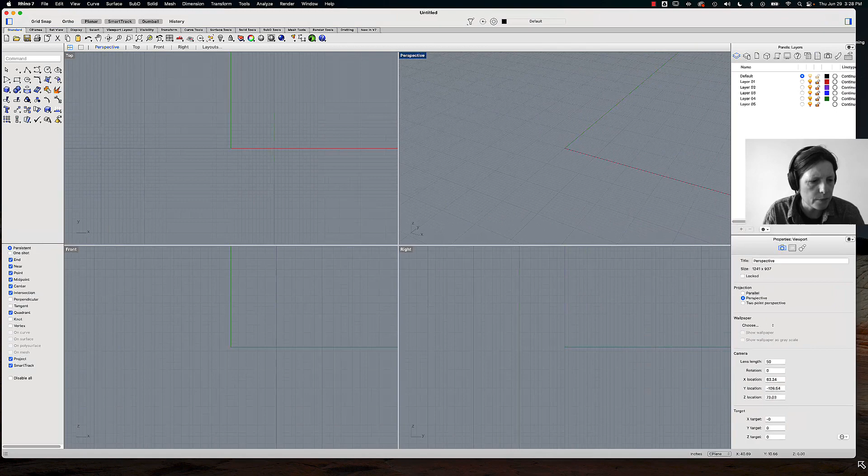Okay, so here we are. Here is the basic interface. I am working on a Mac, so if you're on Windows, your interface will look a little different. If you are on a Mac and don't have these tabs, I will show you in a minute how to change your interface preferences so that you see those. They're actually quite handy, and they also give a bit more similarity between the Mac and Windows versions.

Okay, so the first thing I'm going to do is talk a little bit about the interface. Like any other application, there is a menu bar up here, and you can see these are some of the things that you can do. You can draw curves and surfaces, solids and mesh. Here are some dimension tools, etc. So that's the menu up here.

The next menu we have are these here: grid, ortho, planar, gumball, etc. For the Windows version, you will go down here—they should be down there.

Moving down, we have this area here. You can see command—I'm going to get into that in a minute. That's the command line, which is a very central part of Rhino and something very useful. Below this, you have a bunch of icons to create geometry with. Below that, we have what are called object snaps, and we can also refer to those as O-snaps. We'll definitely be using those a lot throughout the course.

Then you will see your main window here. We have 4 panels, and you can think of those as windows into a view. The default opens up as the top view, perspective view, the front view, and the right view. I'll get into that in a minute again. You can also change the views here, but if you only want to see the top view, you can click on top, and that's going to open up the top view.

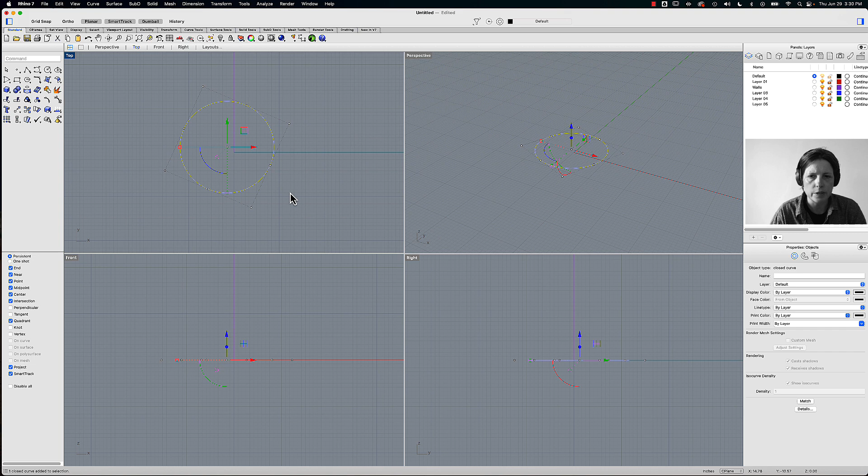Underneath here is our properties. For example, if I draw a circle, you'll see this will contextually change to whatever object I have in here. I can show and hide these side bars with this icon here, if I wanted a bit more real estate, like so, and I can bring them back. I think that's about everything.

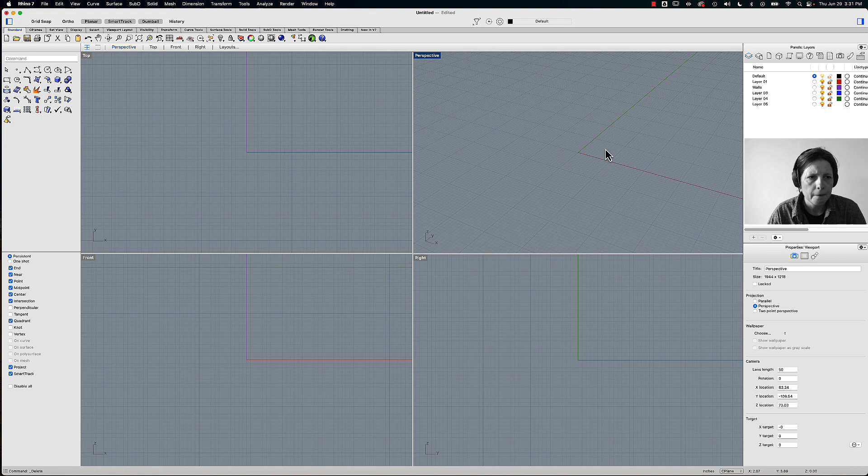You can also move these panels. Let's say you have a lot of layers and need a bit more visibility, you can open that up a bit. I can also drag these windows. So let's say perspective view is my main view. I'm going to make sure that's the biggest view, and resize my other views. Let's bring that back to where that was.

Okay, so that's the viewports. Let's look a bit at navigation. Before going into drawing objects in Rhino, I'm just going to pick a box real quickly, and I just drew a box in perspective view.

You can see the default is what's called wireframe mode, which just shows the wireframe that creates the geometry. If I want to change that view, I can right click on this tab and go to shaded, rendered, or ghosted. So I'm going to choose shaded, and that will create a shaded object.

Now it doesn't change for these other views because I'll have to change that as well. So let's go to the top view and say shaded. I can change the views independently, which is quite handy. I'm going to keep this one to wireframe.

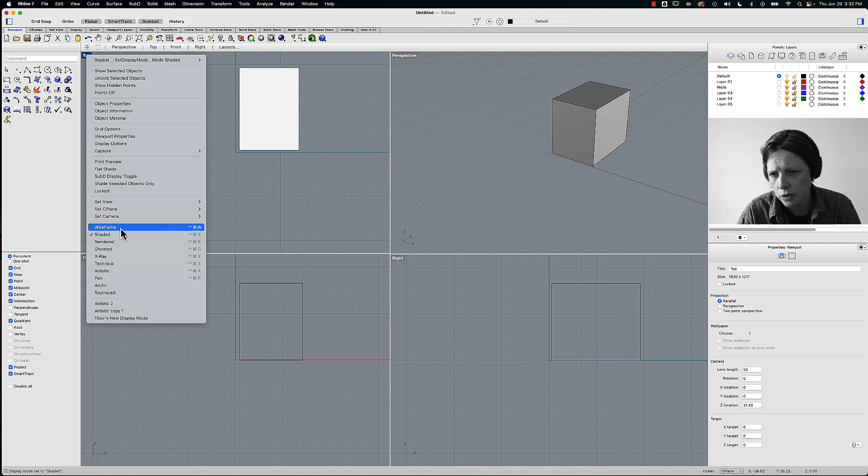Some other view modes that are handy are ghosted, which allows you to kind of see through the object. The color of your ghosted object might be different than mine because I've played around with my preferences, and I'll show you how to change that.

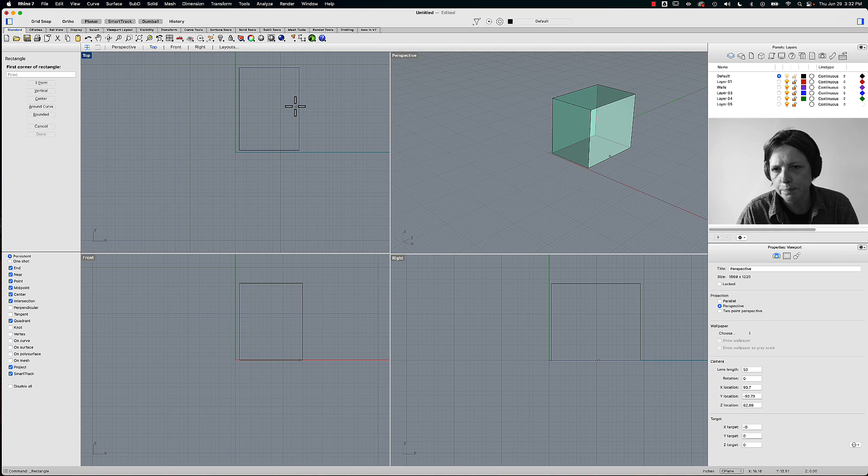What's great about ghosted is that, let me just draw an object here, I can see through it, but I can still sort of see what's going on with the outside geometry, while also seeing through it. Let's compare that to shaded over here, so you'll see what the difference is.

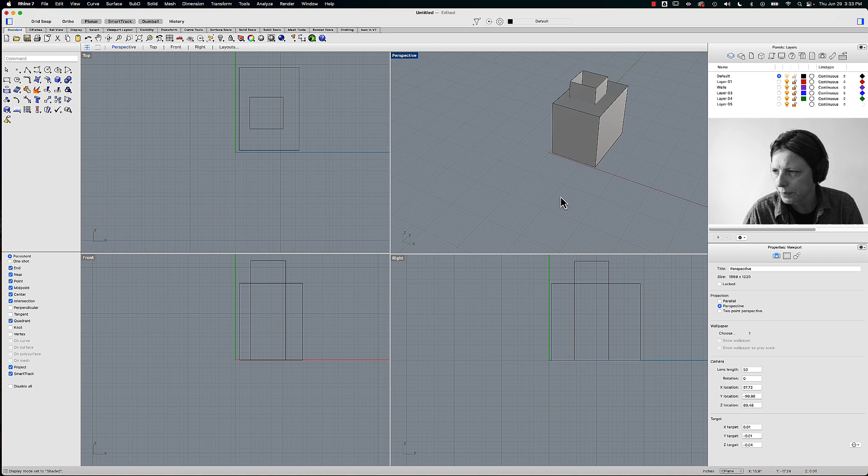Okay, so that's a little bit about views. Let's talk about navigating now. Simply put, always make sure you have a 3-button mouse. You want something that has a scroll wheel in the middle and two buttons, a left and a right.

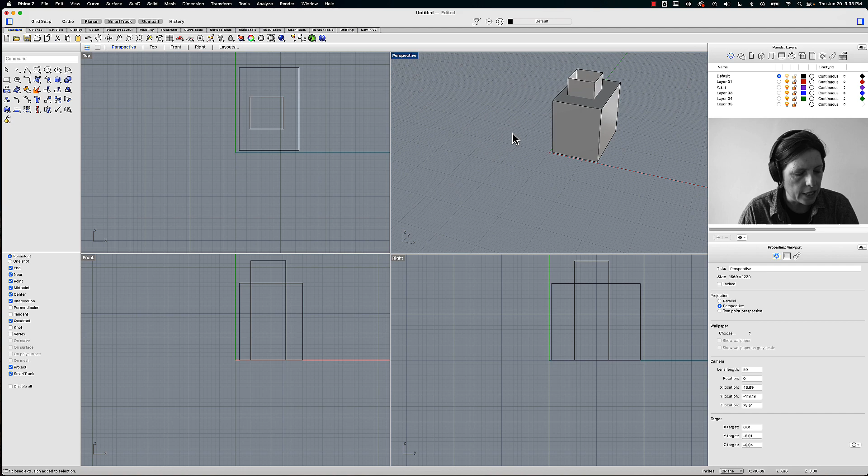In order to zoom in and out in perspective, I can simply scroll away from myself or scroll towards myself to zoom out. That's zooming, and that goes for all the different viewports. I don't even have to select the viewport, I can simply hover over it and start scrolling, using my scroll for zooming in and out. So let's go back to top view.

I'm scrolling in. The other thing I can do is pan. I can use this icon here, or I can right click and drag. Exactly the same goes for front view: zoom in and out, right click for drag. On the right, zoom in and out, right click for drag.

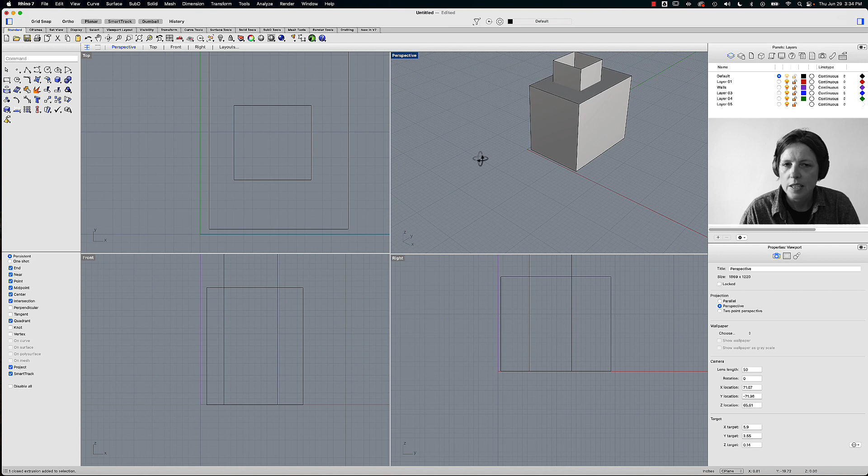But in perspective, zoom in and out, you'll see right click actually rotates. So perspective has one more navigational function, which is rotate, because we're in perspective. We don't need that in any of the other viewports. So in order for me to pan, I hold down Shift and right click. Shift and right click is pan, and just right click is going to be revolve.

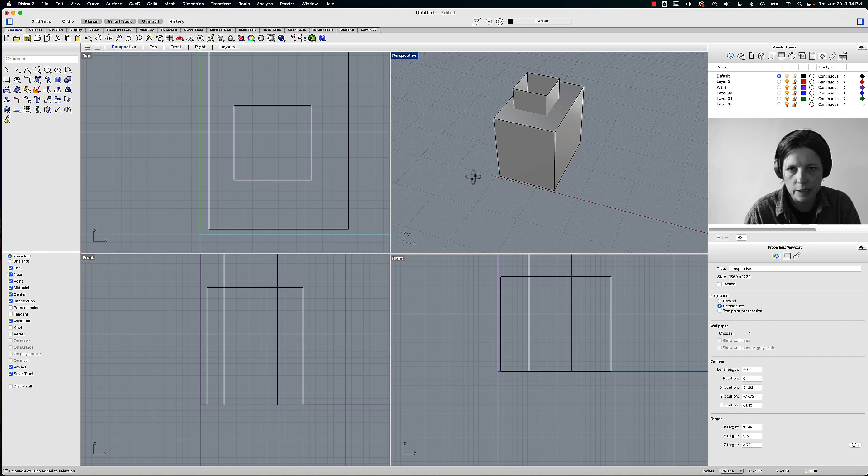You can also find those icons here: here is rotate view, here's pan, here's zoom. I hardly ever use these icons. It's good practice to really get to know the shortcuts.

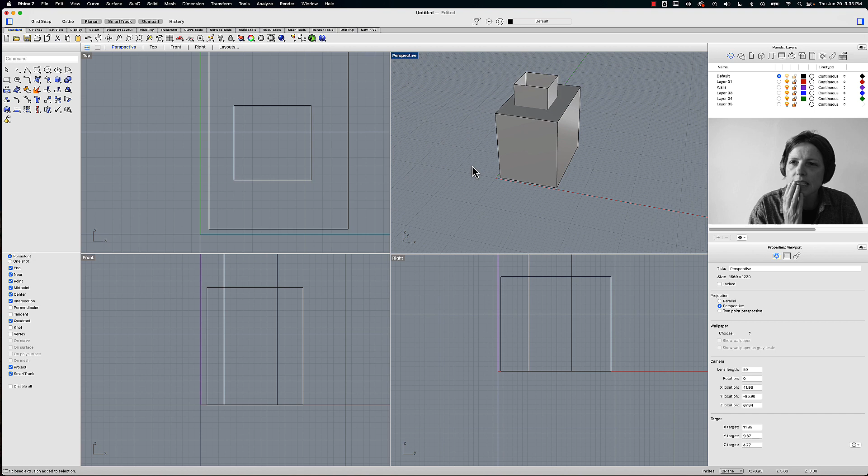Okay, so the next thing I wanted to talk about is how we create things, objects, geometry in Rhino. There are a few different objects, and we'll get more into that in the 2D lesson, but I want to talk about how you can actually create objects. There are 3 ways you can create objects or geometry.

And the first one is up here on this menu. Let's say I want to draw a circle. I would go to Curve, Circle, and this is telling me how the circle is defined from the center and then the radius. So I click on that. You'll see that this panel here changed to my command line with all the options for how I want to draw a circle. It's asking me for the center of the circle, so with my grid snap on, I click here in the center, and now it's asking what is the radius. I'm just going to drag out, and there is my radius. So that's one way of creating a circle.

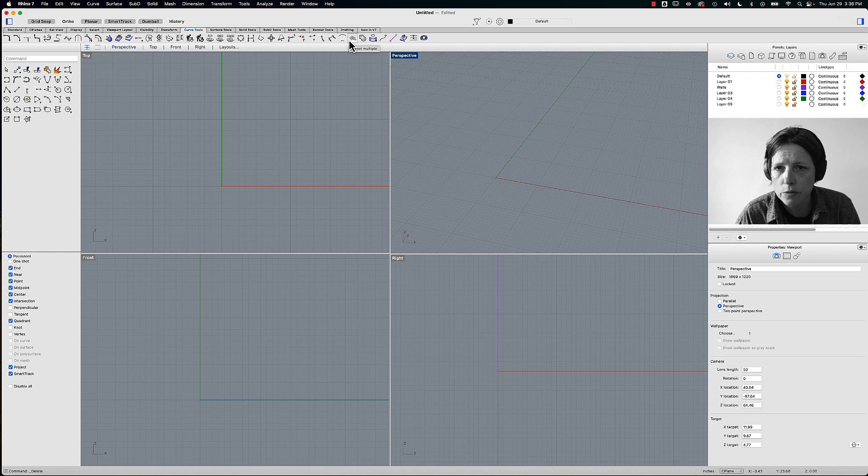The next one would be to go down here to Curve Tools, and let's see if I can find circle. I actually don't see circle on here. I guess I have to go here. So I would go here and draw a circle. Alternatively, if I don't have this tab on and I'm in standard, you'll see that here's circle, circle, center, radius. So that's the second way how we can create geometry.

The third, and I think the most useful way, is using the command line. Unlike many programs you might have used, this might be new for you, but Rhino is a command-based application, which means I can type in commands that function like macros. They tell Rhino what to do.

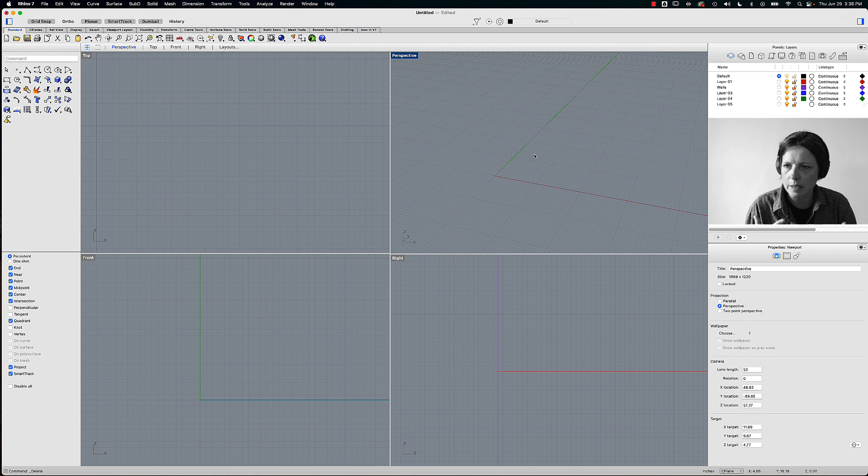So for me to draw a circle, I can just start typing CIR, and you see there's circle. Now, one thing a lot of beginning students do is click in the command line and start typing there. You don't need to do this. I could be anywhere and just start typing circle — it speeds up the process a lot. So here's circle, I'm going to press enter, and I can do everything now with my keyboard.

It's asking me for the center of the circle, so I'm just going to type 0. If I just type 0, that means X is 0, Y is 0, and Z is 0. You can see there is my point in the center of my perspective view. It's asking me for a radius.

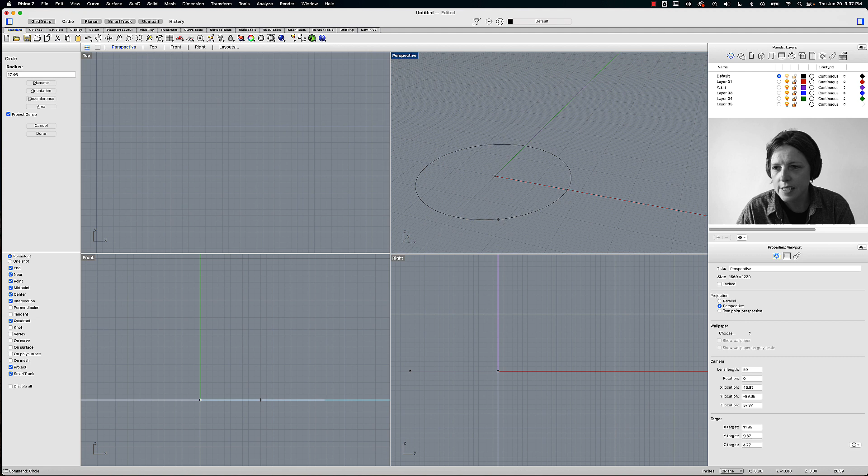What if I wanted to draw a diameter instead? Well, you can see on the left it says diameter, and under the D there's a little line. That means if I click D on my keyboard and then enter, it will let me put in diameter. So let's say instead of 34.93, I want a diameter of, I don't know, 12.89, something random. Then I press enter, and there is my circle.

And I can do that with many, many objects, a lot of geometry, simply by typing in. So let's do another 2-dimensional object like a rectangle. Rectangle — where do I want this one to be? Let's say I want this one to be 0, 5, 5. And then I'm going to make it 50 and 50 in the length and width.

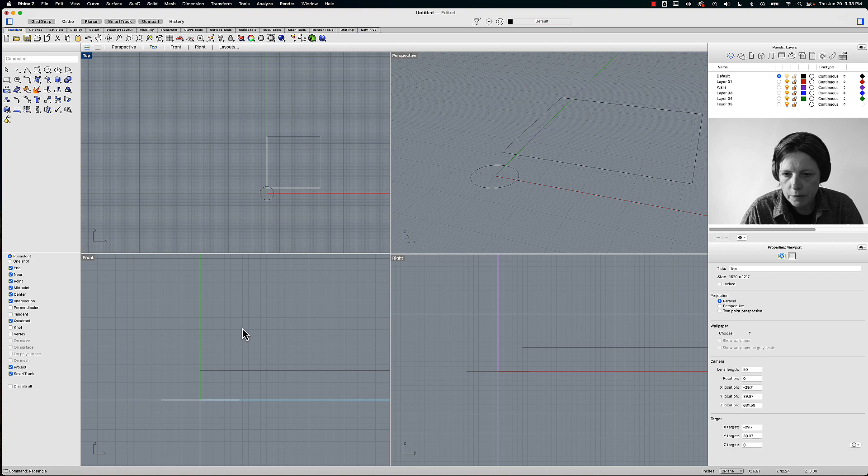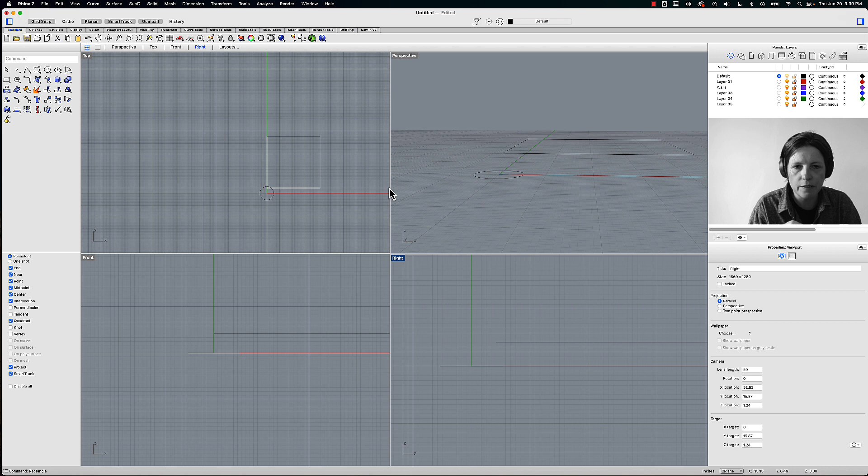And there we go. Now, what you will notice is, let me just go to the right view here — my rectangle is sort of hovering. That is because I typed in 0, 5, 5: 0 for X, then 5 units in the Y, and 5 units in the Z. So you see it's kind of hovering there.

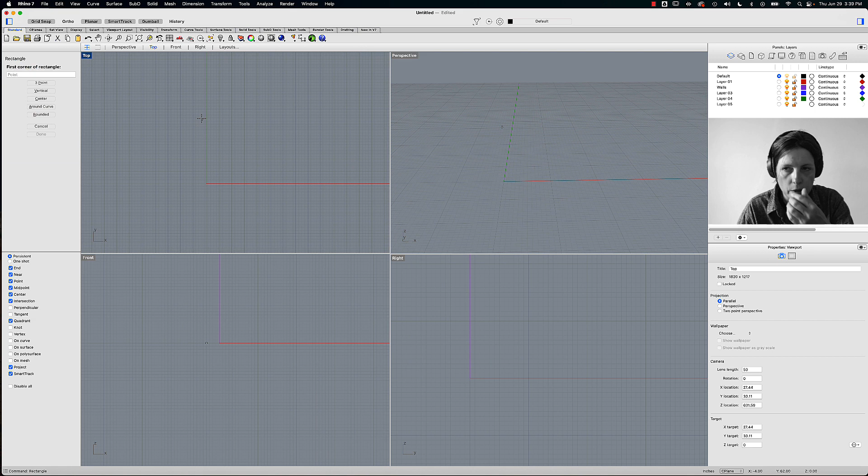Maybe now's a good time to show you selection. So what I'm going to quickly do before we go on with more commands — I'll get back to the gumball in a minute — is just draw a bunch of rectangles here to show you some selection techniques.

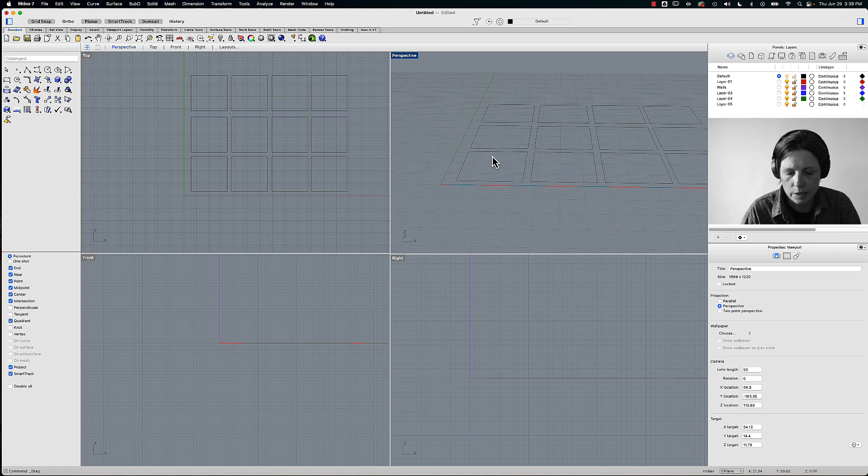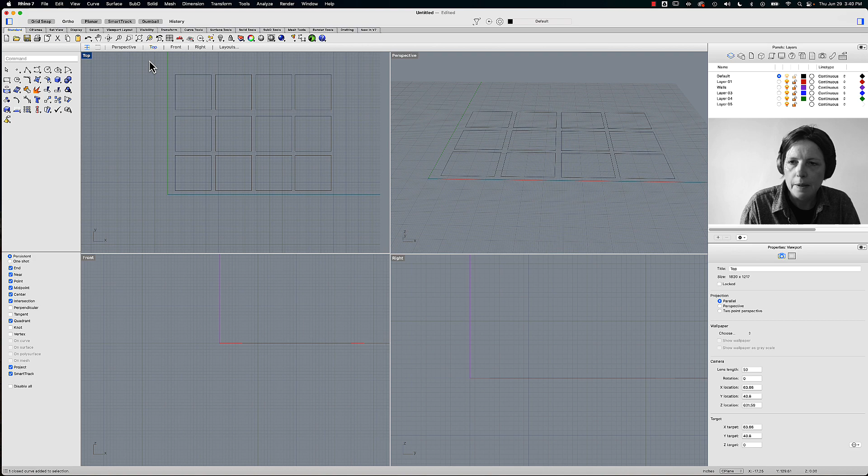Rhino has two ways of selecting. I can either drag from the top left to the bottom right, or from the bottom right to the top left. Notice how it's different: the one I'm selecting from top left to bottom right has a solid line around it, whereas if I click and drag from bottom right to top left, there's a dashed line around it. This means anything fully inside this window will be selected. Let me do that again — I'm dragging from the top left, and the only thing totally contained in this window is that top square, so that will be selected.

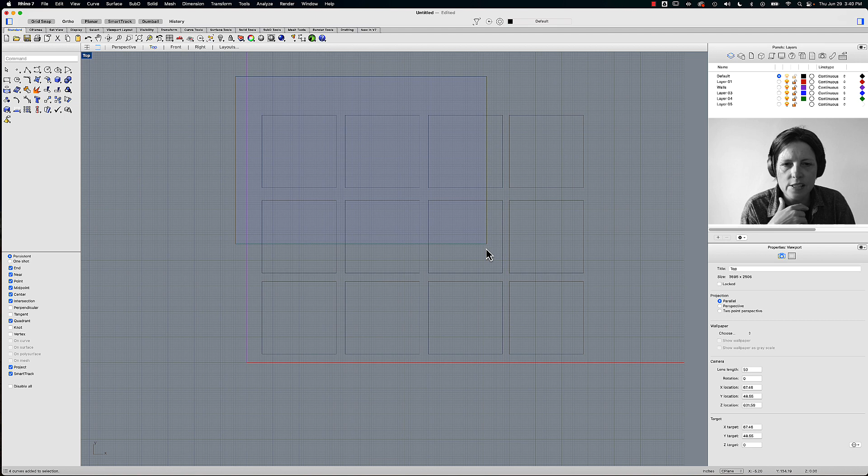If I select from down here, everything this box touches will be selected. Let me do that once more with the top two - it doesn't matter, I have all of these selected, but this one, this one, and this one are not inside the box, so it only selects those two squares. Whereas if I select from here up, everything that these dashed lines touch is going to be selected. That's a quirky way of selecting things, and it might not make total sense now, but it's extremely useful once you start modeling with many layers.

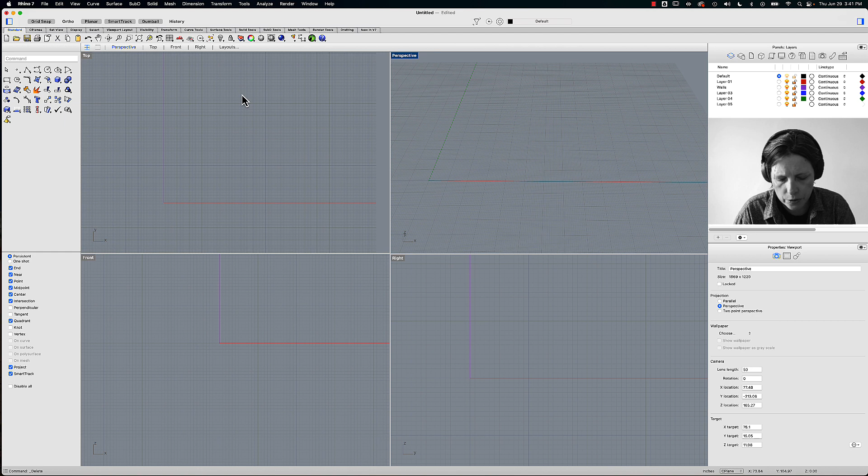Okay, that's making selections. I want to go back a little bit to the command line. Let me delete that because I just want to show you that even if I type in box, first corner of the box, and make this a 50 by 50 by 50 box, you see that I can also draw three-dimensional objects with the command line. In addition, I can also do other things like scale, rotate, etc., with the command line.

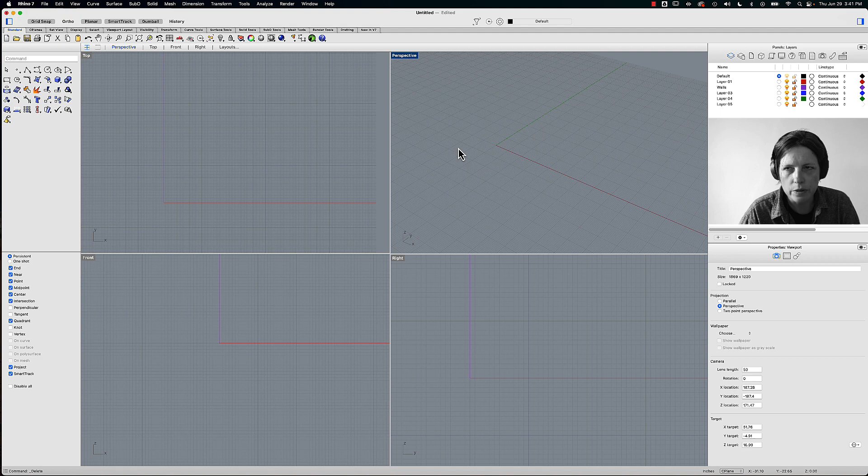Okay, I will very quickly show you the very basic types of objects you can draw in Rhino. The first one is two-dimensional geometry, which is some of the first tutorials we cover, and that's in 2 dimensions - so it's planar. When we do that, we're going to work mostly in the top view. For example, I could do a polyline.

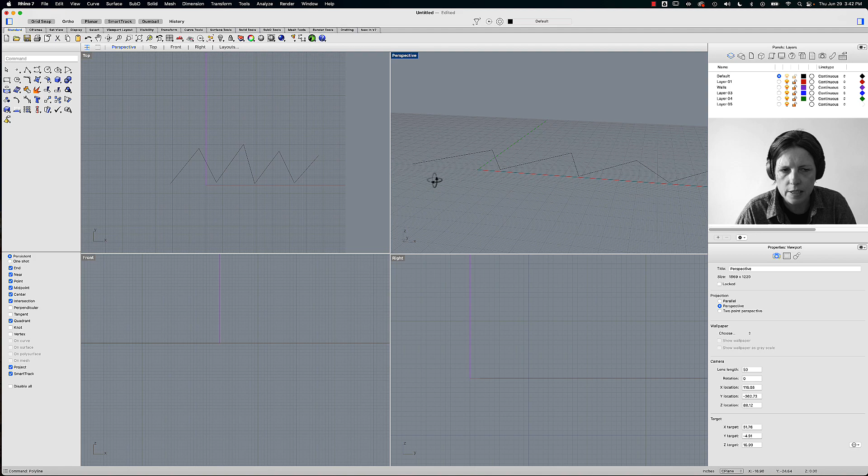So there's a simple polyline, and you can see that is a 2-dimensional curve. We'll get into curves and NURBS-based modeling in later tutorials, but just to give you an idea of what the different objects are, let me go through here.

So we have points - these are just locations in space. They don't actually have any weight, they won't print, they're literally just points in space. They're very helpful to model, to use as guides for modeling.

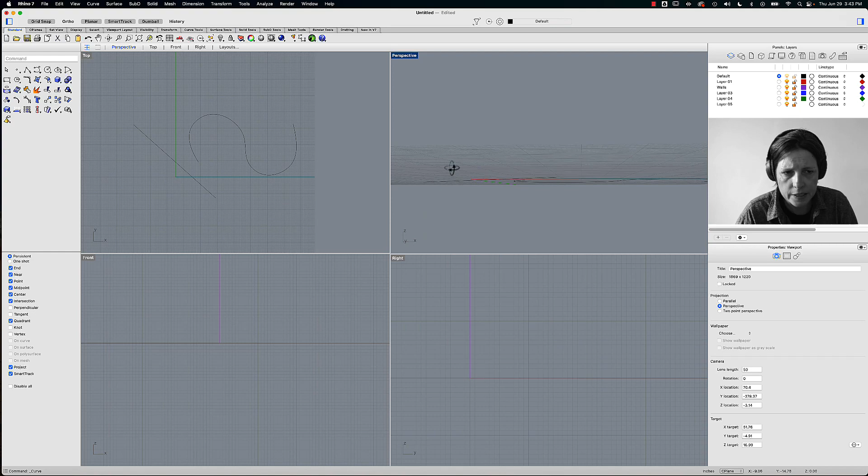Then we have different ways of drawing lines. For example, I can do a line from midpoint - that just means I'm going to draw a line like that. Then I have curves, and the most common one we'll use is the control point curve. So I'm putting down control points, and that's drawing a curve. Press enter when I'm done, and you'll see that is planar to the XY view.

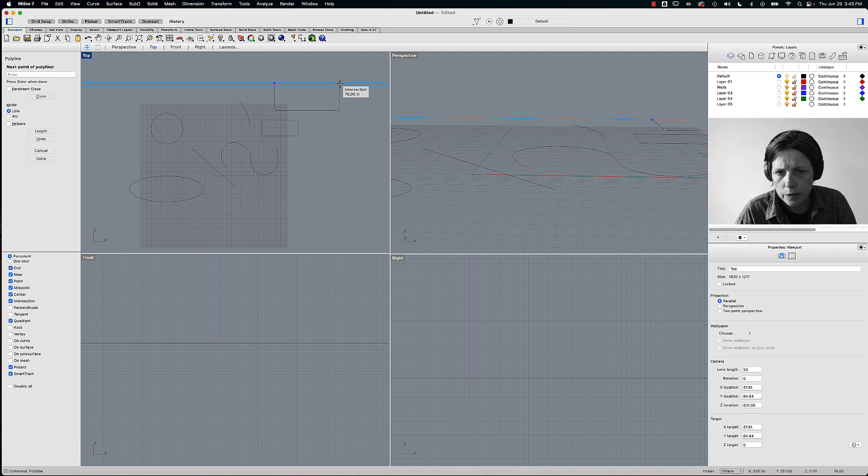Next up we have things like circles. I'm going through these very fast because I have a whole lesson on this. We have ellipses, arcs, and rectangles - these are all primitives that are included. So you don't have to go polyline and tediously draw a polyline, that's included - I can just draw a rectangle here. And then we have polygons as well.

So these are all 2-dimensional curves, and as you can see, each one of these is defined by control points. That is how Rhino draws geometry. So let me just delete those.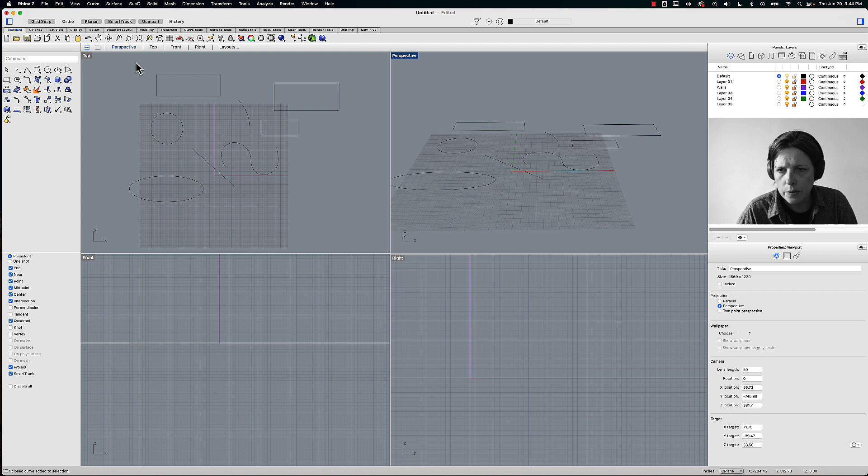The next category is what's called surfaces, and the most basic surface is a plane. I just typed in plane, and as you can see, it's just a flat surface - it doesn't have any thickness. You could think of it as a piece of paper, but it's a little dangerous to make that assumption because paper still has thickness.

The way that Rhino works is - let me just draw a box here to demonstrate. So this is what's called a solid. Now if I click on this and say explode, you'll see that it separates into surfaces.

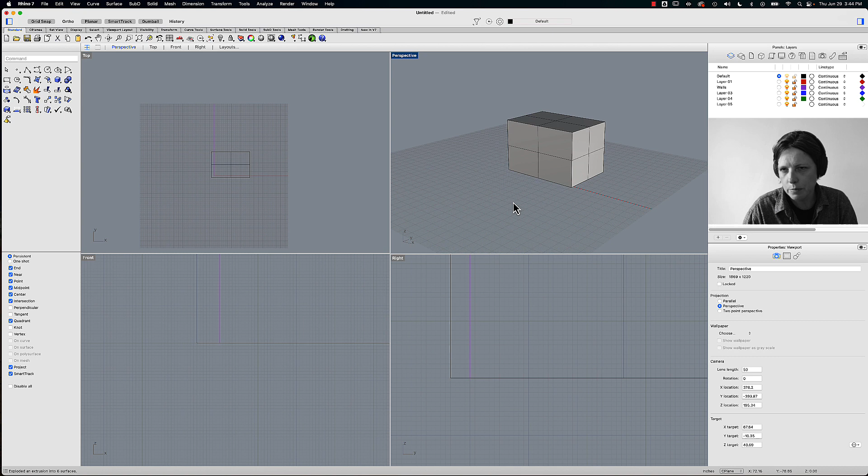So now I can drag these surfaces away - it's a good time to show you Gumball. I have Gumball selected, and I'll click on my Gumball. I'll get into that a little more, but you can see that when I drag these away, this box is made out of these surfaces. When I drew it, all those surfaces were glued together, so when I exploded them, they turned into all these different surfaces. Let me do that with a different primitive.

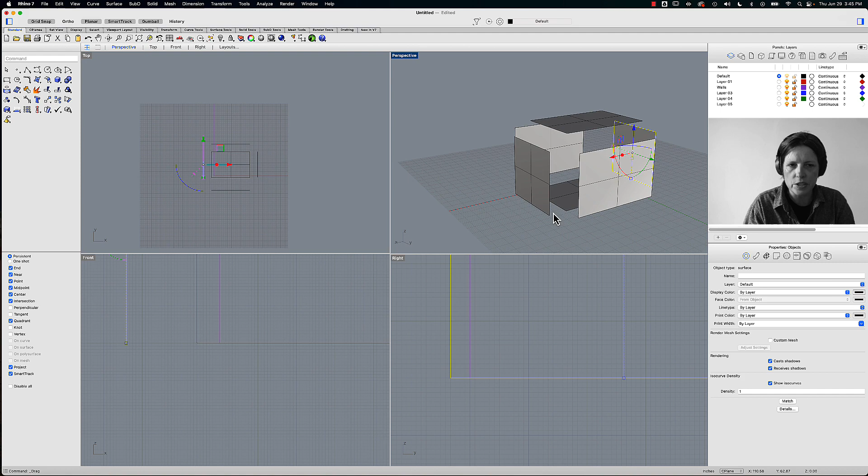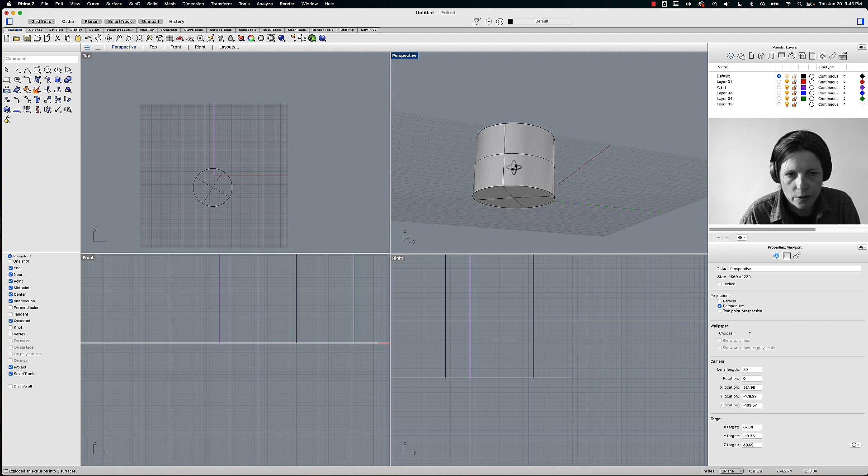So here are 3D primitives, more about that in a second. Let's say I want to draw a cylinder - here's my little cylinder. You'll see that when I move it around, it moves as an entity. Now I'm going to type in explode, and you'll see that I get these isocurves, and now you'll see that this is how Rhino draws a cylinder.

We can also take something like this - so this is an open surface. Let's say I want to turn this into a solid - I can just select that and say cap.

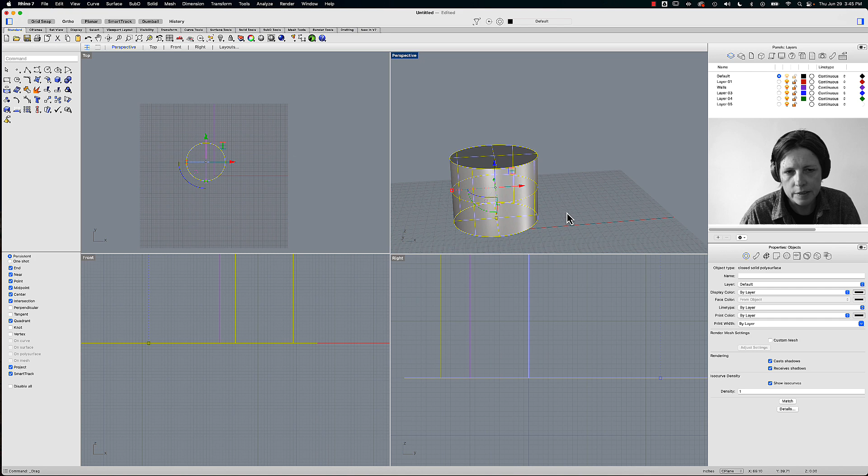Okay, so that's surfaces, we'll get into that a lot more in future tutorials. There are other ways to draw surfaces, and this is very much how we model: we start with 2D curves, make surfaces out of them, and then make solids out of them. It's a very classic way of modeling.

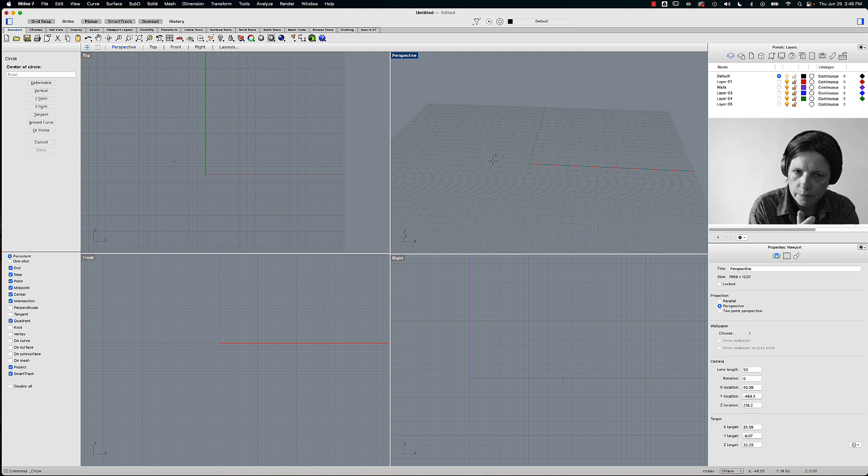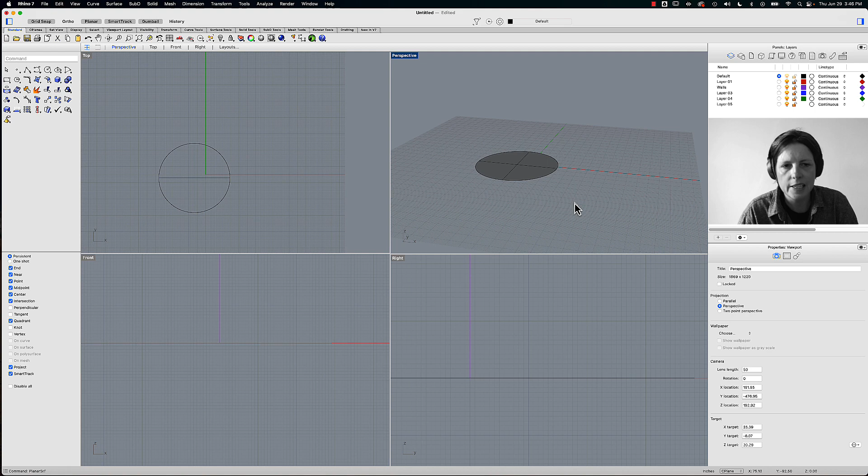For example, I'm just randomly drawing a circle. Here's a circle, it's two-dimensional, I can see straight through it, it's just a curve. Now let's turn this into a surface. I'll select that and type in planar surface, telling it to make a surface planar to that curve, meaning flat, in two dimensions. So there it created a surface.

Now if I want to turn this into a solid, I need to extrude it. So I'll type in extrude surface. There it is. I can tell it which direction I want to extrude to, or extrude it on both sides. If I click delete input, it deletes the curve I started with, but I tend not to delete inputs so I have curves to build more geometry from. So here's my little cylinder.

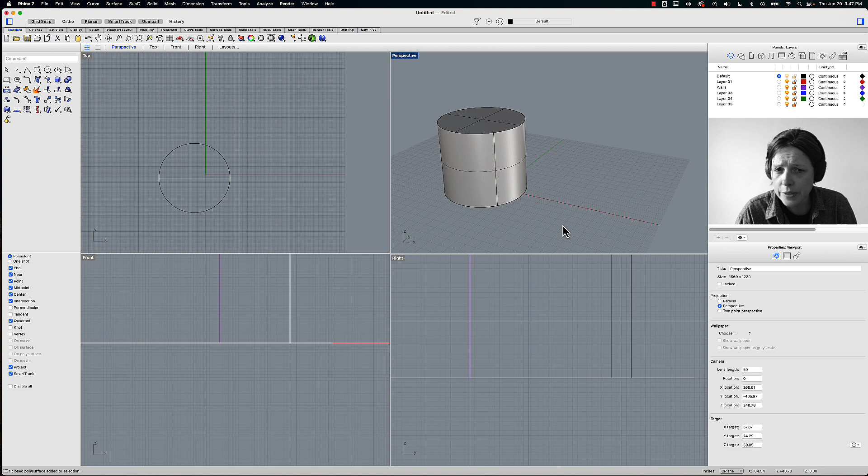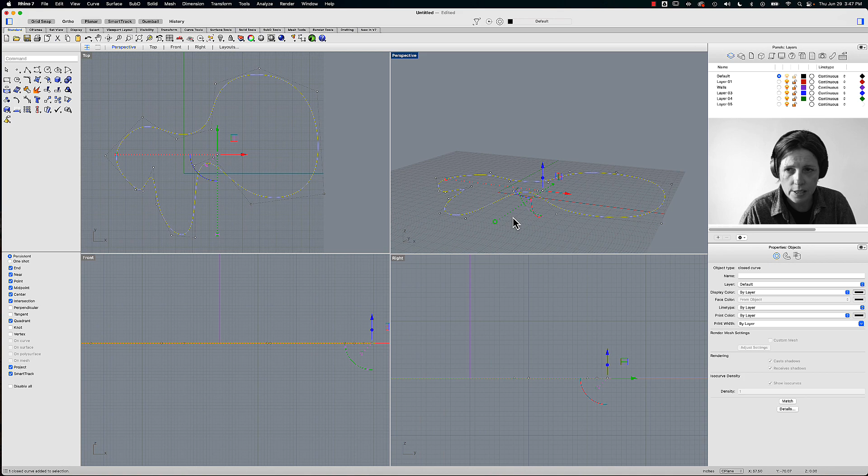So I can do that not just with primitives and rectangles, but any kind of curve. For example, I could be designing some crazy shaped building, and let's say I wanted to mass this. Before, I showed you how to take this curve and turn it into a planar surface; we can also directly take this curve and extrude it. Instead of typing extrude surface, we type extrude curve. Our options here are both sides, solid, delete input.

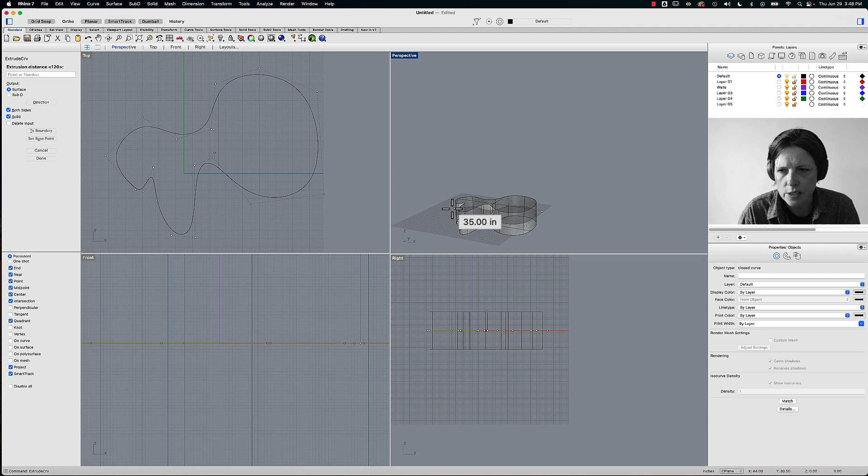I'm not going to talk about SubD in this lesson right now, but similarly with both sides, you'll see here in the right view I'm extruding from both sides. But let's say I just want the one side, and that's it, I can just extrude. And there is my mass that I created from this curve.

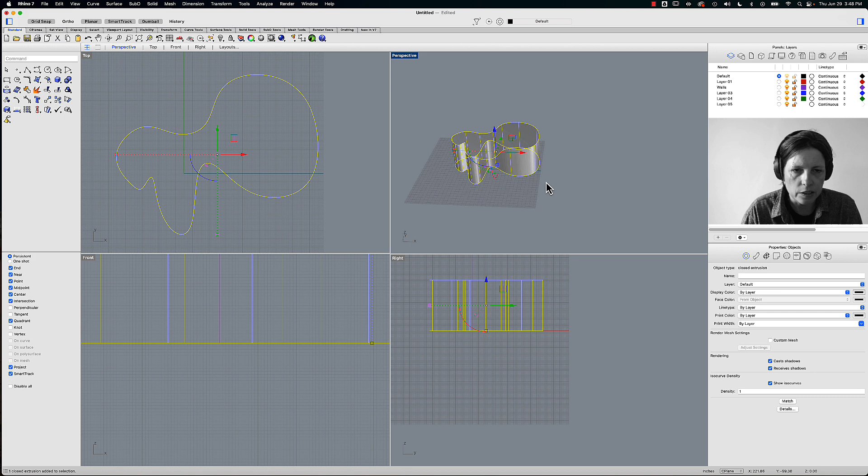Couple more things for this tutorial: we're going to look at layers, which we'll use a lot. So we're in the default layer, and you can see it's selected with this radio button. Be careful, if I do this, the layer is not selected, I'm merely making a selection. I need to make sure I click on the radio button there.

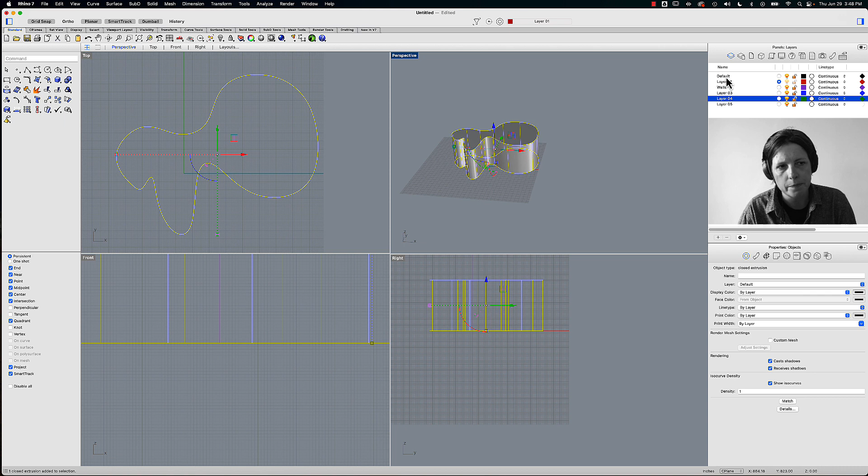So you can see the default is visible. This is how you toggle the visibility; if I click on that, you'll see it disappears. I can also lock my layers, and that's great for when you have reference images you want to draw on top of, so you want to make sure you lock that.

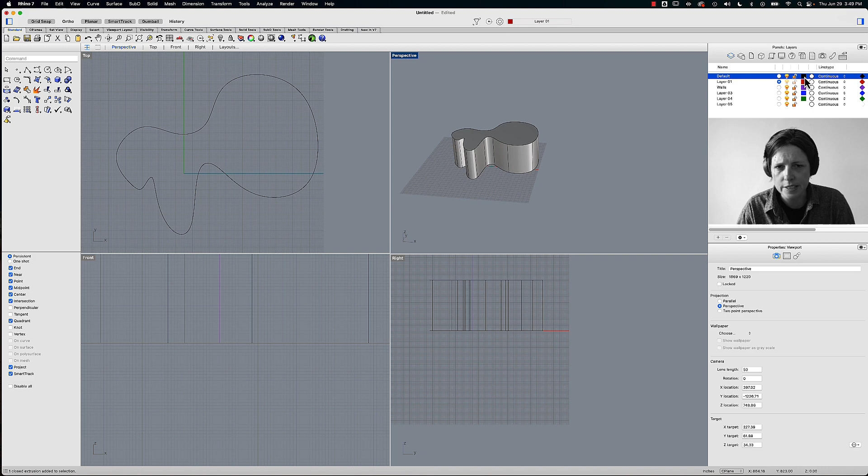Right next to this you have the layer color. If I click on that, it opens this dialog with several ways to pick a color, but let's say I just pick green. It's going to change every bit of geometry I draw. Oh, see, I have layer 1 selected that is red, so that's why it's drawing in red. Let's go back to green and draw another cone, and you'll see this time it draws in green. If I click on this again and change the color, it will change all the objects on that layer.

I can also change the name of my layer. Let's say this is my reference image, double click—this might be my exterior, or let's say this could be the plan, maybe this is the section, etc. So I can change the layer names there.

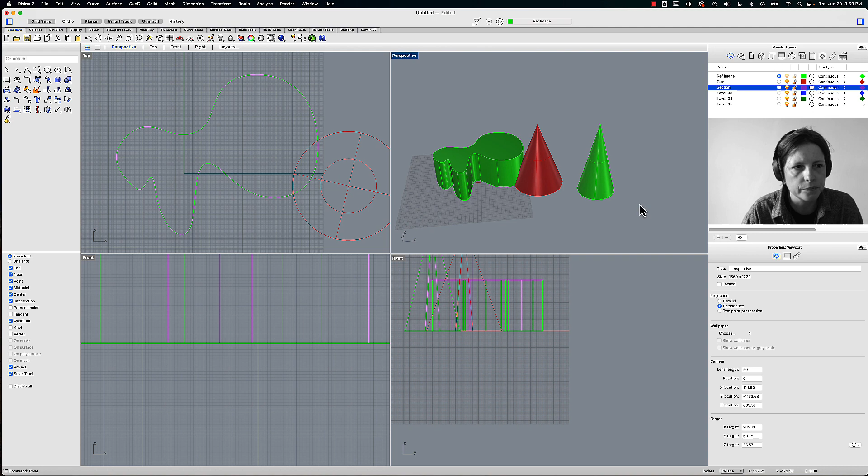Some other things I can do are change the print color and the line weight, but we'll get into that a little bit more in subsequent tutorials.

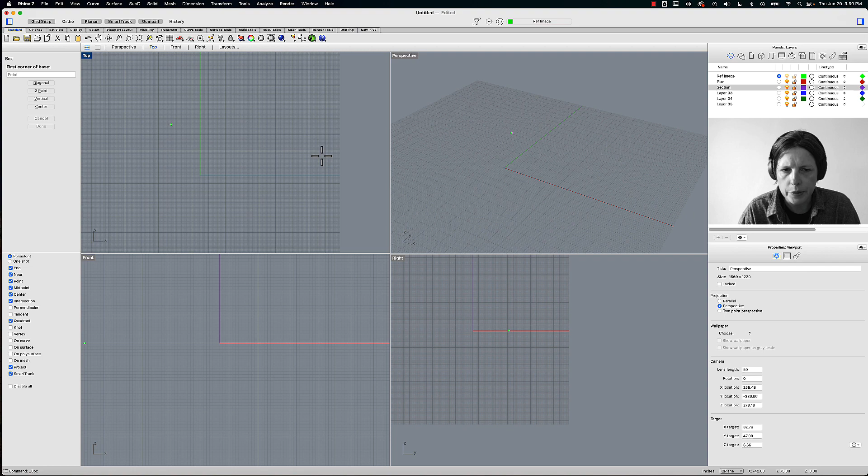I think I'll show the gumball real quickly. So let's draw a box, and I'll change this color back to black. I can select this box, and let's shut the gumball off. If I want to move this, I can type in move. From this point I'm going to hook to that point—actually, let's draw a point first. I'm drawing a point here; I want to move this box from this point to this point.

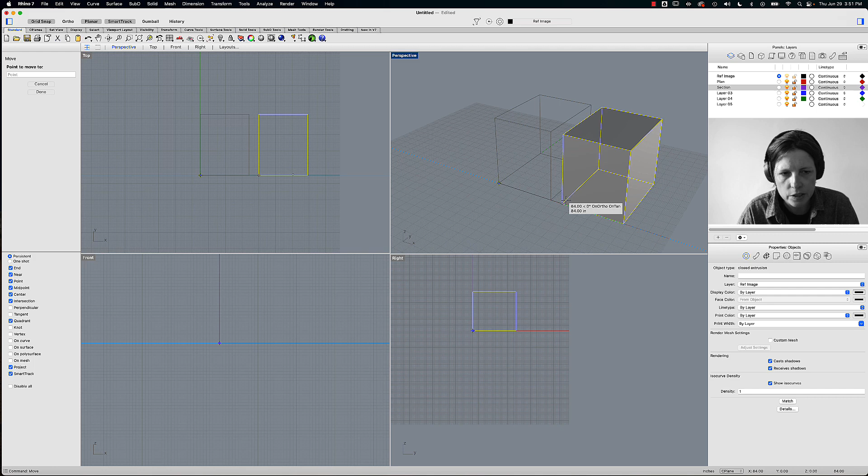I'm going to type in move from this point to this point. Now you see how it says point there, and that is because I have my O snap on, my point snap. Your O snaps are down here, and these are incredibly useful. We'll get into that in a minute.

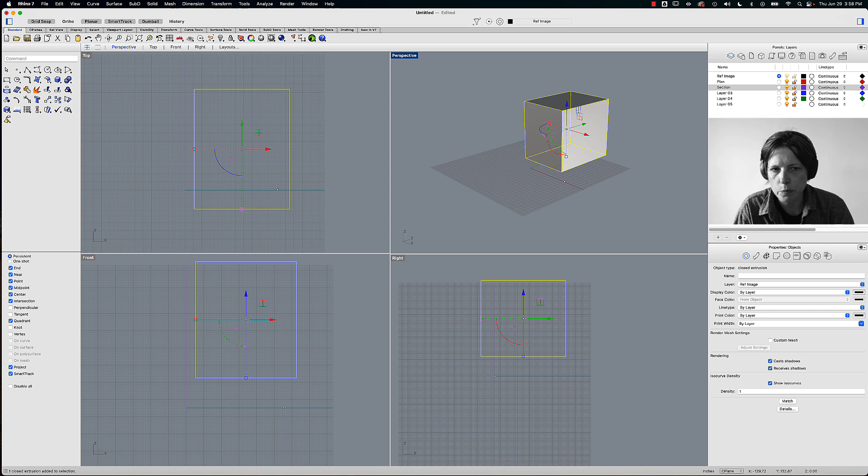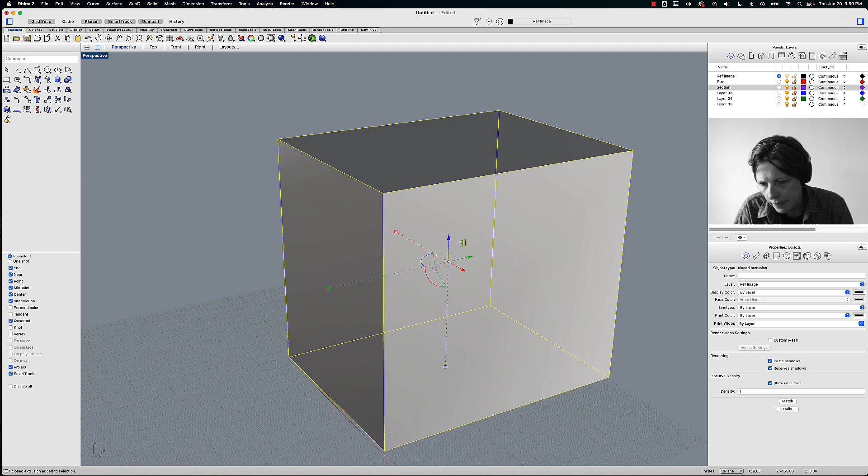Let's talk a little bit about the gumball. We want to make sure gumball is turned on, and any object I select in the viewport will show the gumball. It consists of a blue arrow, a green arrow, and a red arrow, which correspond to the 3 coordinates. The y-axis is the green arrow, the z-axis is the blue arrow, and the x-axis is the red arrow.

So I can move objects by dragging. Right now I'm dragging in the z direction. Right now I'm dragging in the y direction. Right now I'm dragging in the x direction.

I can also be more specific. Let's say I want to move 50 units, 50 inches since we're in inches here, in the y direction. I can simply click on the middle of this arrow - the end of it is to move, and the middle of it I can type in a value. Let's say 67. So it's going to move 67 units in the y direction.

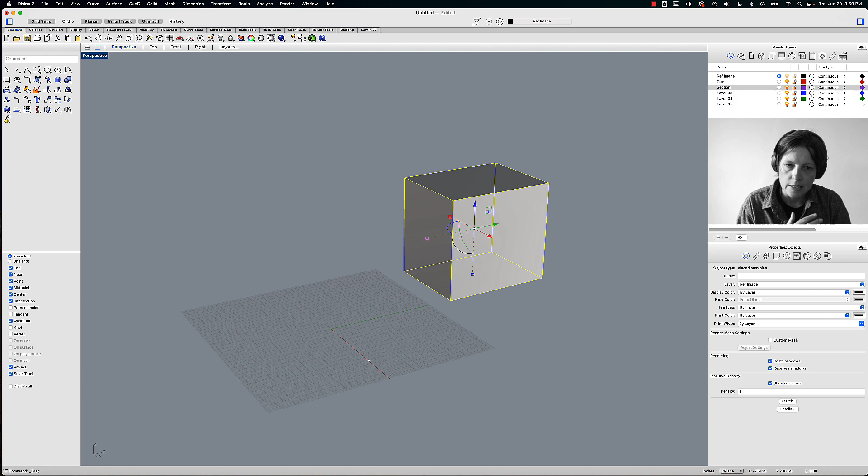Let's say I made a mistake and I want to move back. I can simply put a minus in front of that, minus 67, and it'll move it back. I can do that with any of these. There I'm moving, let's say, 78 in the z direction, and I want to move back minus 20 in the x direction, etc.

Okay, so those are the arrows. Then you will see these little arcs, and those are for rotation. Here I'm rotating around the y-axis, and I can do that by dragging. If I hold down shift, it's going to constrain in 45 degrees. I can also click on this and type, let's say, 48, so now it's going to rotate at 48 degrees around that axis.

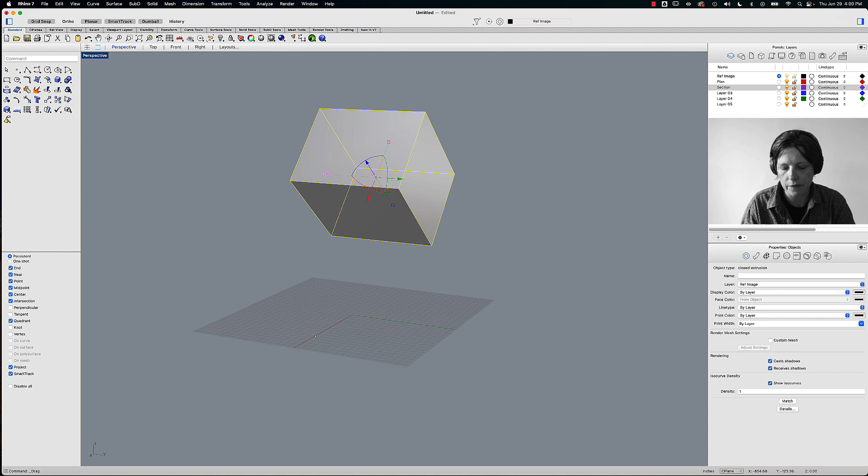And I can do that for the blue, the Z axis. Right now I'm rotating around the Z axis. And I can also rotate around the X axis.

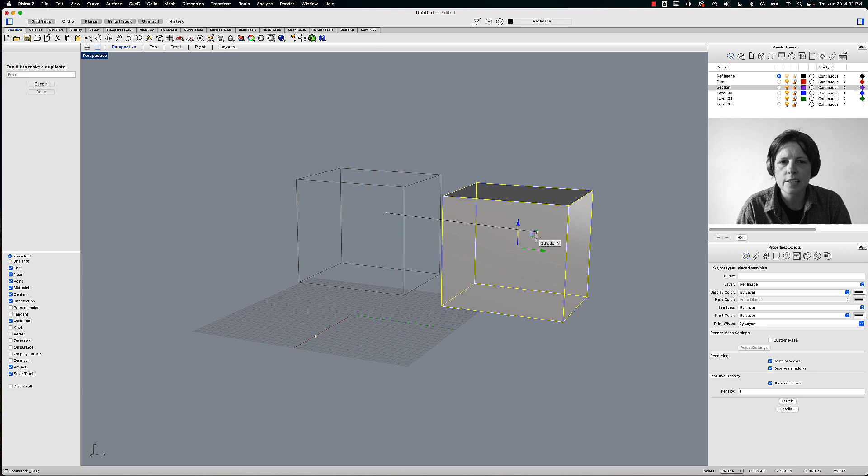The last thing I can do - actually 2 more things. This little window here drags the whole object in 3 dimensions. Right now I'm just dragging it around in the X, Y, and Z direction - instead of really doing one by one, this does all 3.

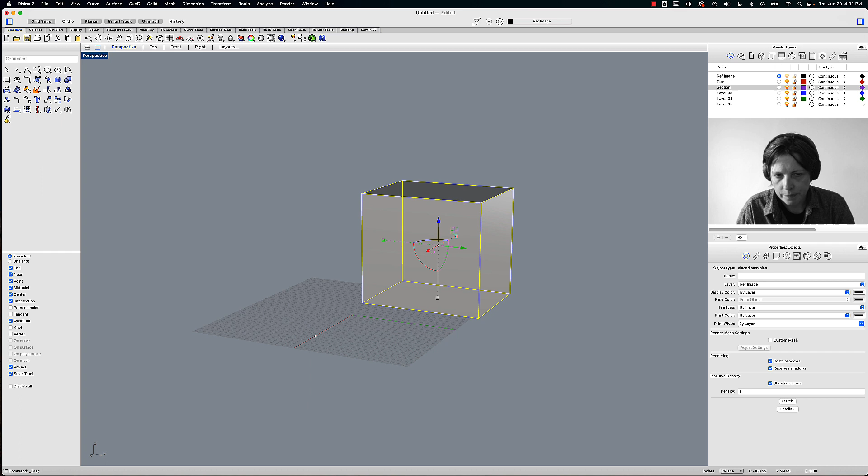Then lastly, we have these little dotted lines with the squares at the end. That's for scaling. If I just grab this one, I can scale in 1 dimension in the Z, or I can scale in 1 dimension in the Y, or in the X direction. If I hold down shift, I will scale uniformly. So that's the gumball.

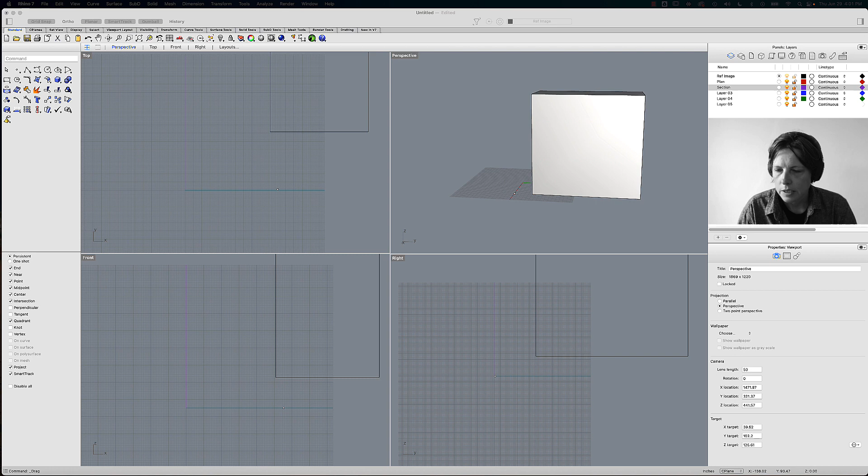I think the last thing I want to show is the object snap. So let's do a quick something here. I'm going to draw a circle in the center, something like that. Now, if I wanted to draw a line from the center to the quadrant...

Let me just switch off all my Osnaps here. Right now, I don't have any of my Osnaps. I'm going to type in line. How do I know where the center is, right? I have no information here.

So what I'm going to do is turn on my center snap, and type in line again. Now notice as soon as I hover, it's a little white line and it points to the center, and it tells me you're now going to start at the center if you click. So that's exactly what I'm going to do - I don't have to be exactly on the point to click. Once it says this, it's hooked onto the center, so I'm just going to click.

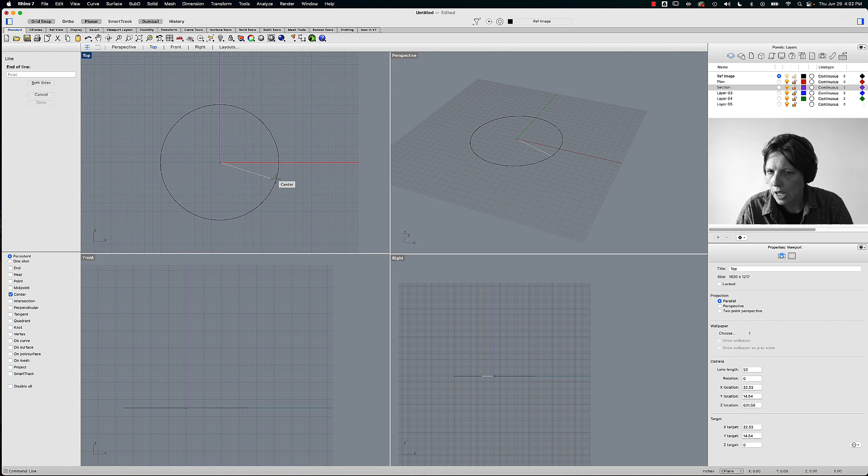Now, how do I get this quadrant? Very simple - I make sure I have my quadrant Osnap on. Now I'm going to go around, go around, go around. Ah, there's my quadrant - it's snapping to the quadrant and I can click.

There is one more useful aspect of Gumball. I'm just going to draw a quick circle in top view. I can quickly copy things in different directions. So let's say I wanted to make a copy of this circle in the X direction - I simply hold down Option and drag on this arrow here, and you'll see it'll quickly make a copy of that circle in that direction.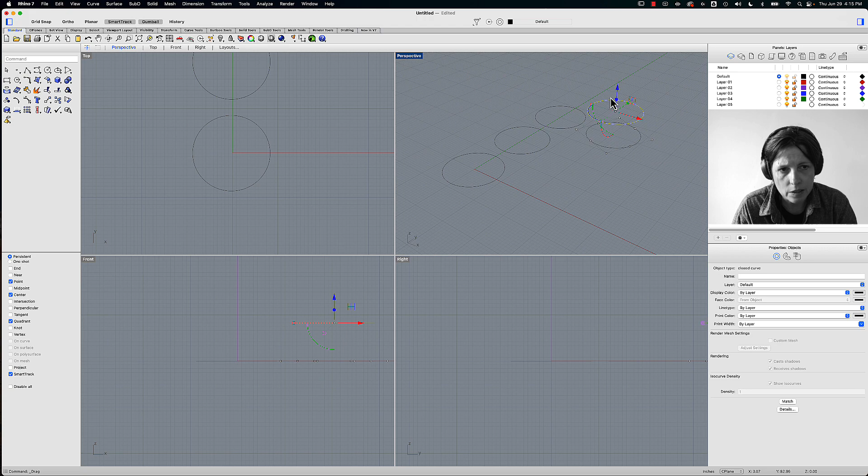I think that about covers it for the Gumball.

One last thing I wanted to show - this is kind of an aha moment for many people to understand all these viewports. I'm going to draw a quick plane in the top view. Now watch what happens in the perspective, the front, and the right view as I do this.

I'm simply going to type in 0. As I move my point, I'm going to hold down Shift because I want to draw a perfect square, and I'll have my grid snap on for this one.

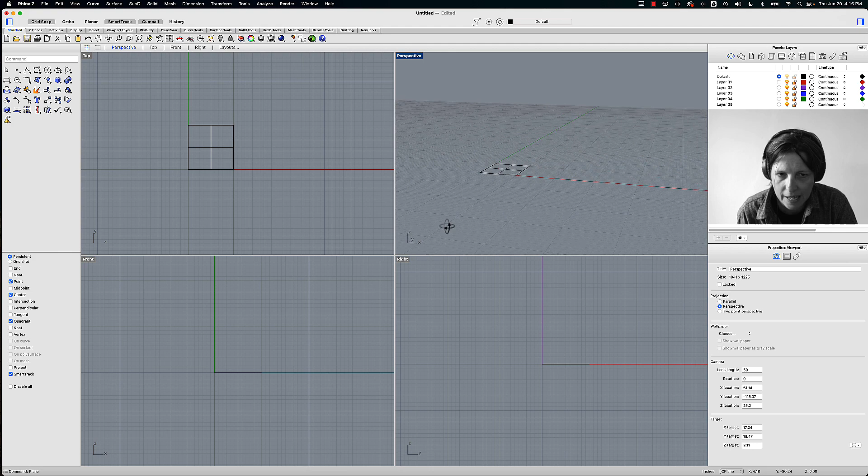So what I did here is I drew a plane in the top view. It's planar to the top view, meaning it's stuck on that construction plane. If I twist this around, you'll see that construction plane exists in the Y and the X - it's laying flat, which is why it appears like this in the front view and the right view.

Let me turn this to shaded view. Now let's do the same thing but in front view. I'm just going to type in plane, also starting from 0. Look what happens - watch carefully in the perspective view.

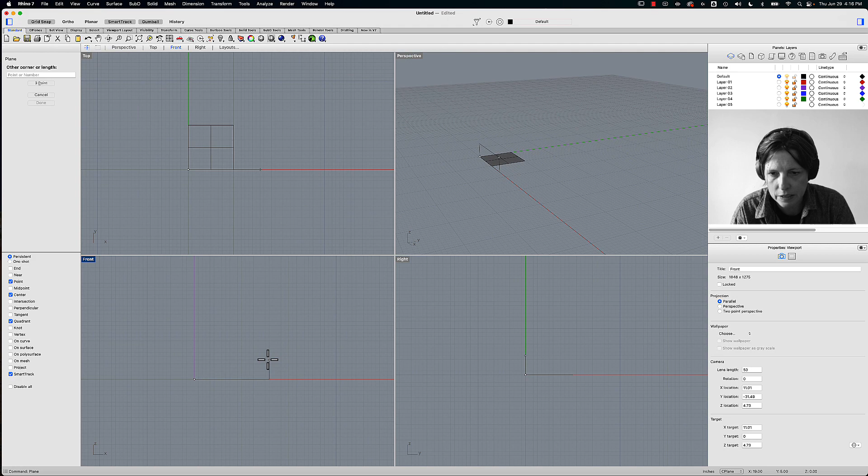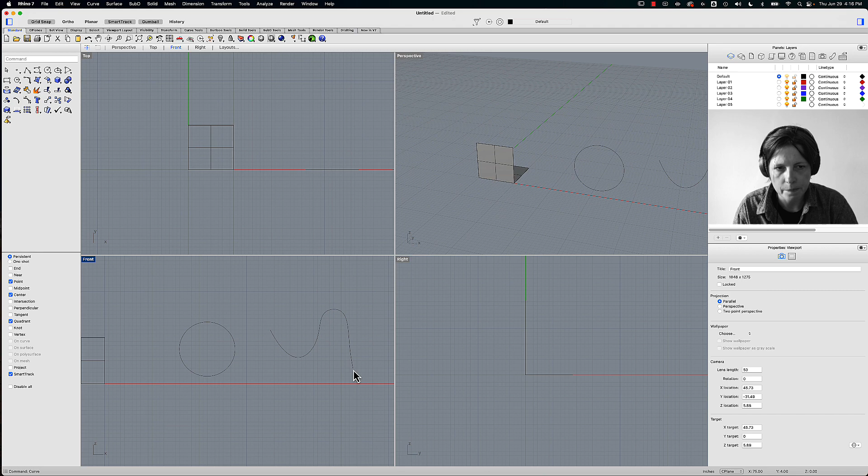So that is my construction plane. I'm just making visible where that construction plane is. Anytime I draw something in front view - let's draw a circle in front view - you see it's sticking to that construction plane. No matter what I draw, if I draw a curve, it's on that construction plane. So this is my front construction plane, my ZX or XZ construction plane.

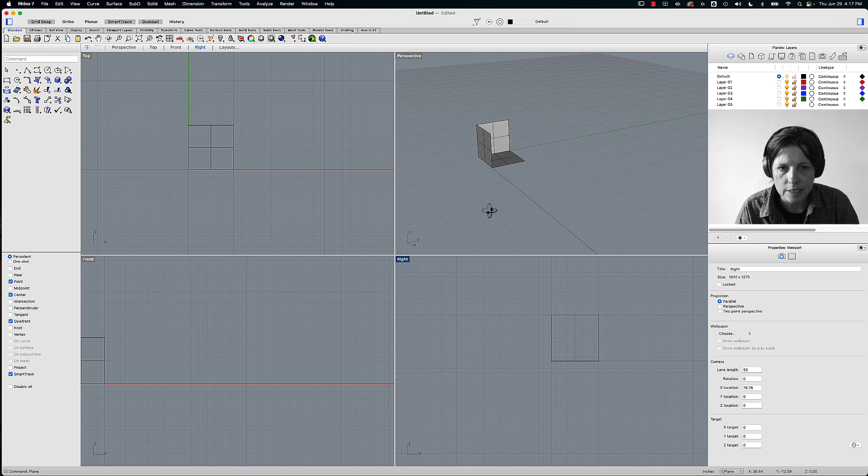Lastly, let's draw one here in the right side. So plane, starting from 0 - oopsie - plane, 0. Instead of my front view or my top view, I'm in my right view. Let's do the same here, holding down Shift. So that is where my right plane view is. Anytime I draw something in one of these views, it's going to draw it on that construction plane.

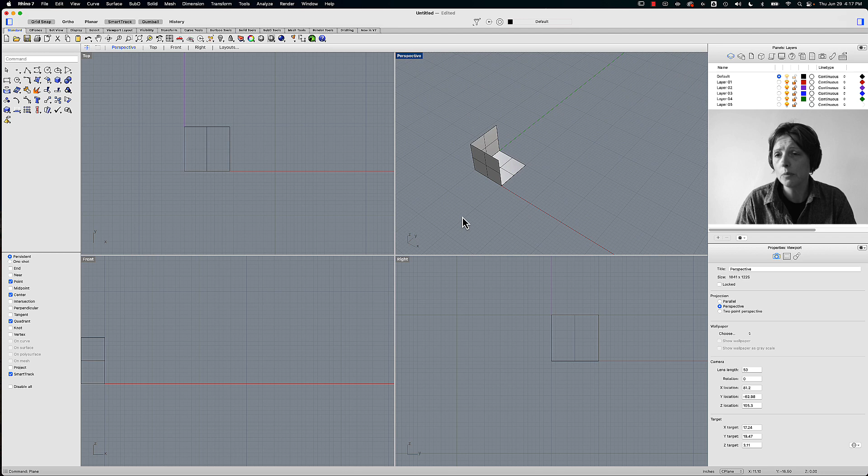It's a little difficult to wrap your head around when you're starting out with Rhino, but you'll soon get the hang of it. And there are, of course, times that you don't want to draw on that construction plane.

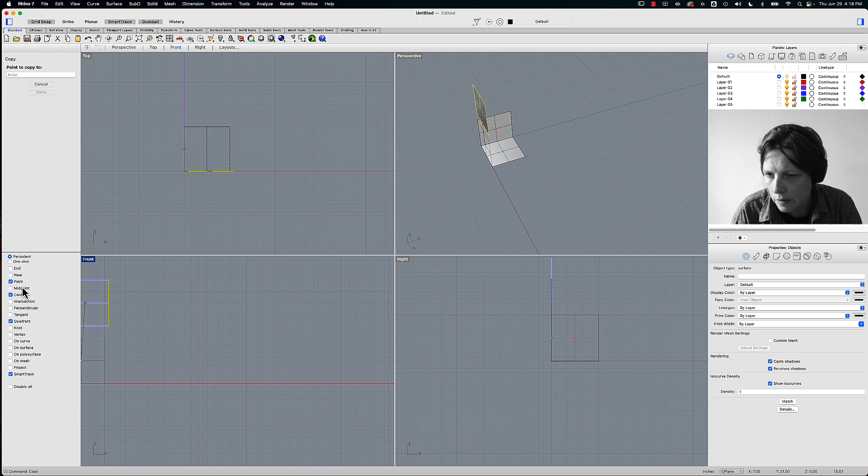Maybe I have something like - let's see, I'm going to draw another plane from... actually, let's just copy it over. So copy this one here from this point to - see, I've got the center point there. So copy. Let's do end from this point to this point.

So sometimes I might want to draw something on this plane here. There are different methods that we can do that. But if I now go to my front view and type in circle and start drawing a circle, you'll notice it drew it on that face there, on that plane. Makes sense?

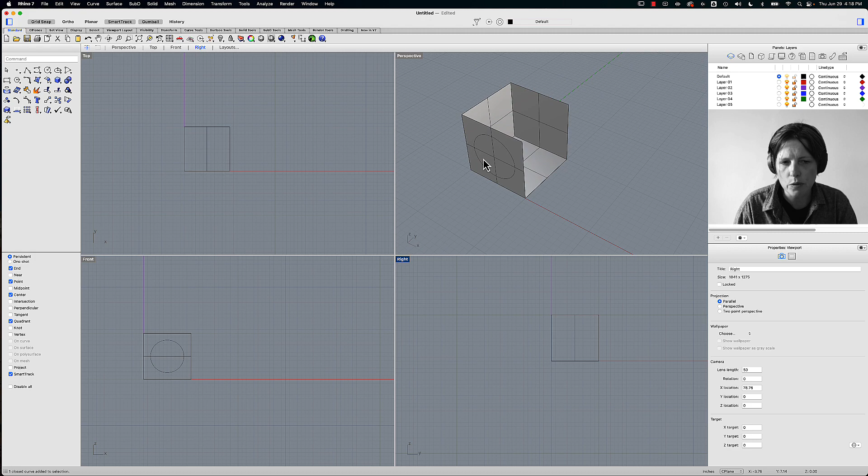In addition, one last thing I didn't show is that you can change your views. Right now this is my perspective view - maybe I want that to stay that way, but instead of the right view, let's turn this to shaded as well. Let's turn all of these to shaded real quickly.

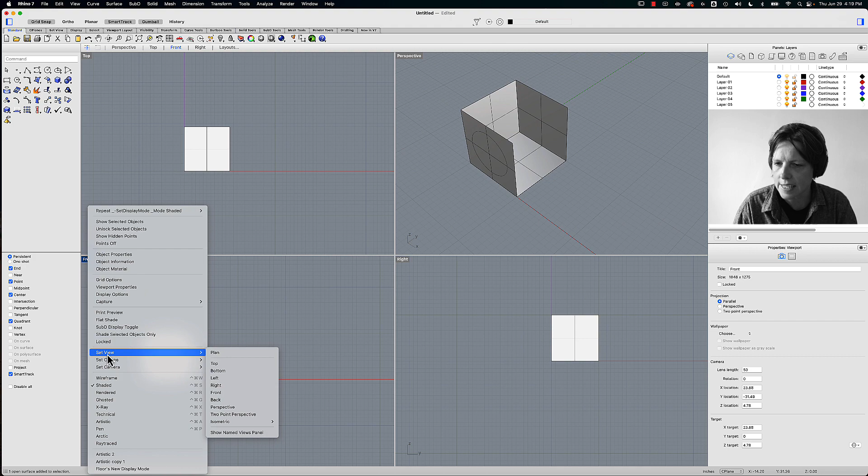And let's say I want to see the back instead of the front. I can just right click here and say set view to back. So now I'm looking at this from this side - you can change all of that.

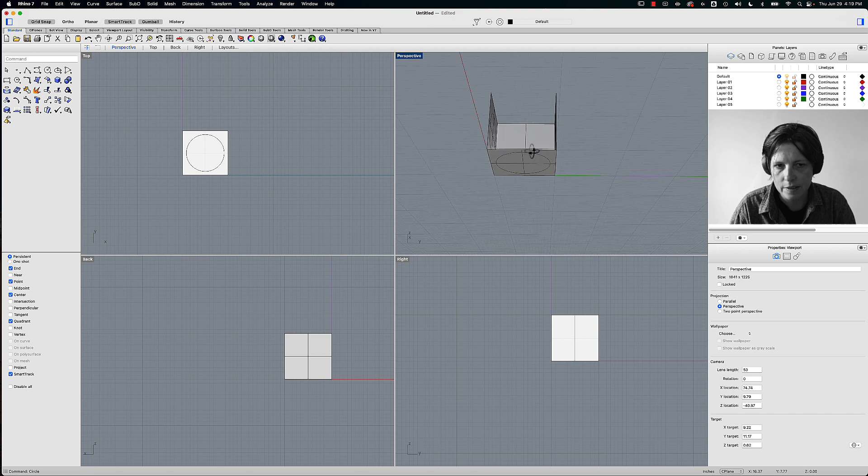Similarly, this is the top view, so let me just draw a circle on here. Let's do that again - okay, so there's my little circle. And actually what I'm going to do is just lift that up a bit. Obviously I can see the circle here because I'm looking at it from the top view, like that.

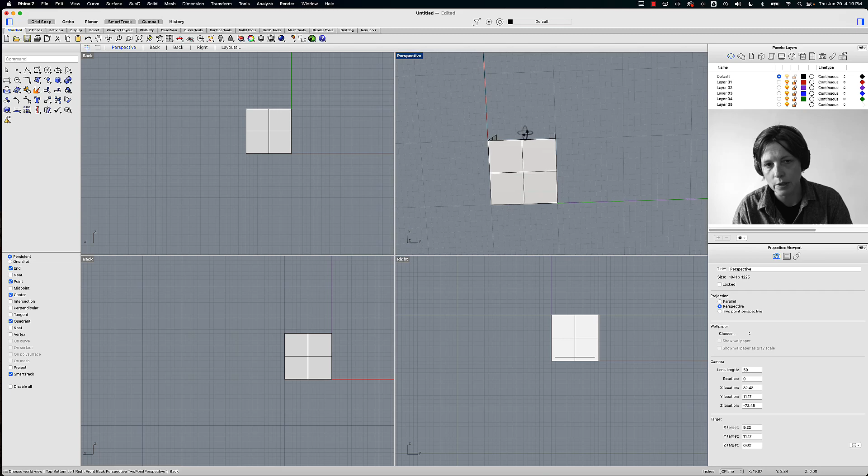Now if I go here and change this to set view to the back, I won't see that, because I'm looking at this side. So that's just something to keep in mind in the beginning - it's a little confusing at first. I had a little bit of trouble at the beginning, but hopefully this clears up a few things just in the very beginning. We'll get into a lot of that in later tutorials.